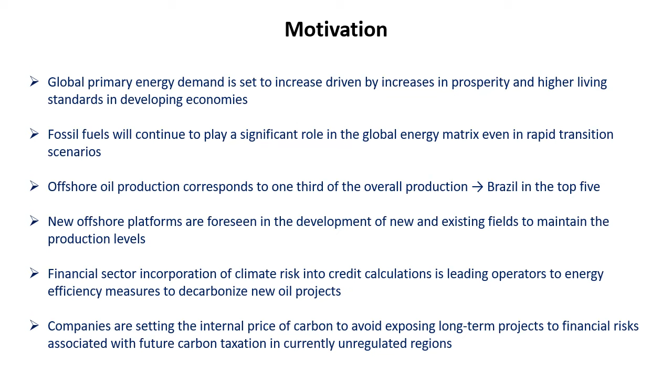The financial sector is incorporating climate risk in credit granting, and this is leading operators to take energy efficiency measures to decarbonize new projects. In addition, operators are introducing the internal carbon price to avoid exposing long-term projects to the risk of future carbon taxation in regions that do not currently have this regulation.

Electricity and hot water generation system of oil and gas production platforms is by far the main source of greenhouse gases in offshore production. The supply of onshore clean energy is not always financially viable due to the cost of long subsea transmission systems. The same is true for wind farms that need to be set in shallow water, sometimes distant from the oil field. The primary processing plants of the platforms are getting bigger and more energy intensive. The allocation of more efficient systems, which is already a challenge, becomes even more challenging in the case of combined cycle, as it occupies 20 to 50% more area when compared to a simple cycle gas turbine.

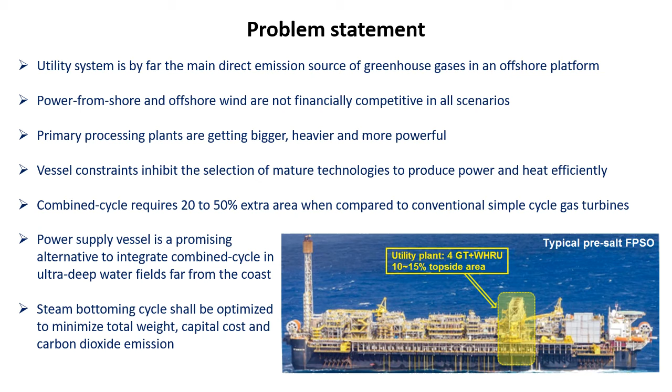Therefore, a power hub becomes competitive in face of industry challenges. Moreover, depending on future carbon taxation, the hub could receive carbon capture schemes, which is not possible in a conventional platform. This work intends to provide designers with a framework to both compare the performance and optimize the design of the steam bottoming cycle to minimize weight, as it reflects directly on vessel cost, as well as the power plant capital cost and carbon dioxide emissions.

In this work, the performance of the utilities plant of a conventional offshore production system containing 4 self-sufficient platforms, that is, platforms capable of producing power and heat internally to supply the vessel demand, is compared with the performance of a production system involving the same 4 platforms, but with power being partially supplied by a central power plant. Fuel gas is supplied to the power hub by the pipeline that exports associated gas to the continent.

It's assumed that the 4 platforms have the same electrical and thermal demand, whose behavior throughout its productive life can be seen in the figure in the lower right corner of the screen. Peak power occurs in year 5 with 81 MW, but the lifespan average power is only 46 MW. Similarly, the maximum thermal demand occurs in year 9 with 46 MW, and the lifespan average heat demand is 22 MW. There is a lag of 1 year before each platform starts operating. The useful life of each platform is 25 years, and the power hub remains active throughout the lifespan of the complete production system.

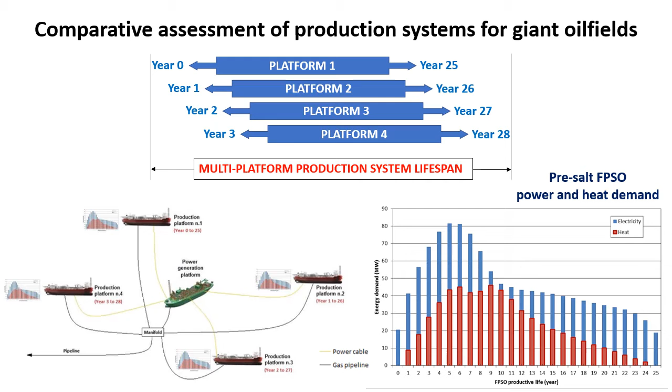In this figure, you can see the control volume of the utilities plant of the offshore production system with the 4 self-sufficient platforms in the production of energy and hot water. This configuration is quite simple. Each platform has 4 Siemens aeroderivative gas turbines model SGT-A35 in 4 at 33% configuration,

which means that the utility system has been dimensioned so that at peak, power can be supplied by 3 gas turbines while the fourth remains in backup to increase operational efficiency in the oil and gas production. Each gas turbine is equipped with its own waste heat recovery unit for the production of hot water at 160 degrees Celsius without burning extra fuel.

The control volume under analysis in this conventional configuration considers the utility plants of the 4 platforms simultaneously. Fuel gas is the associated gas which can be supplied by the platform's primary processing plant or alternatively by the exporting pipeline, for example, in case of gas processing plant shutdown.

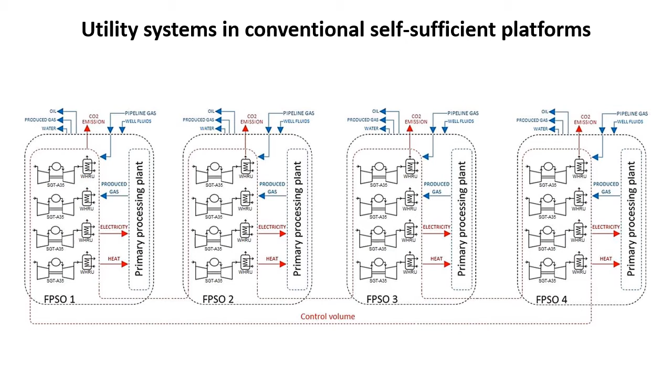On the other hand, the proposed configuration with a power hub adds some complexity to the control volume. Each production platform has only one Siemens SGT-A35 gas turbine with waste heat recovery unit and also 4 hot water boilers with 11.5 MW each, which is capable of supplying the entire vessel's thermal demand even if the gas turbine is out of operation. It's important to note that the hot water boiler has very high energy efficiency throughout the entire operating range, in this case 95%, which is in line with catalog of commercial products.

The power hub has 5 combined cycle power blocks equipped with GE LM6000 PF plus aeroderivative gas turbines with single pressure level steam bottoming cycle, 1 steam cycle per gas turbine. The power blocks are arranged in 5 x 25% configuration, which means that at any power there will be at least one power block in backup to increase the power hub availability.

The control volume under analysis of the proposed configuration considers the utility plants of the power hub and also 4 platforms simultaneously. Fuel gas of the production platforms is supplied as in the conventional case, and the power hub receives fuel gas from the exporting pipeline.

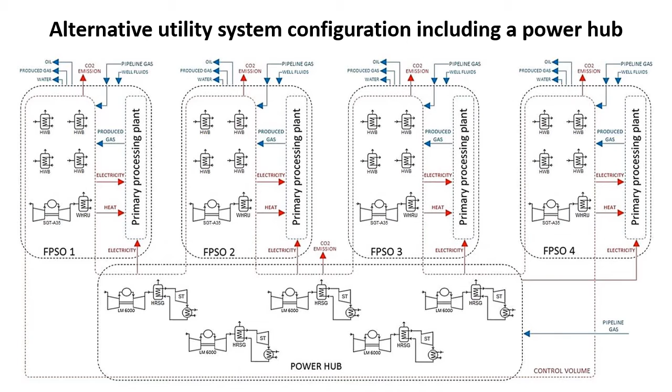Unlike simple cycle gas turbines, the steam bottoming cycles have some design variables that need to be correctly selected by the designer according to the characteristics of the topping cycle and objectives pursued by the power plant. There are 3 objective functions that need to be considered in order to maximize the technical and financial performance of combined cycles for offshore application. The power plant occupied area is important to minimize the size and thus the capital cost of the hull.

The capital cost of the power plant itself is also essential to increase the financial attractiveness of the power hub, and last but not least, the net emission of carbon dioxide per unit of electricity delivered, even more important in scenarios with carbon taxation. The selected design variables and constraints of this work are the steam pressure and temperature in the inlet flange of the steam turbine package.

Design simulations were performed by using GT Pro software in the Thermoflow package. As the software does not have an internal optimization tool, but it does communicate with Excel, a Visual Basic script has been developed to bridge GT Pro and MATLAB for the optimization. An NSGA-II algorithm has been used to optimize the 3 objectives.

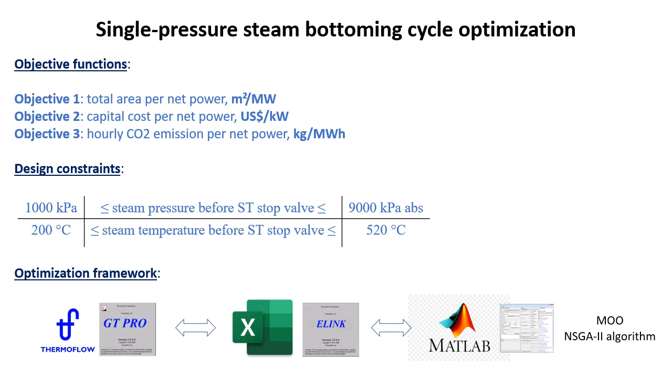The criterion for choosing the Pareto solution that best meets the objectives of the combined cycle considers the normalization of the obtained results. The next step is to calculate the distance of each normalized Pareto solution to 0. The solution with the shortest distance was chosen for the design of the steam bottoming cycle. The table shown in this screen also provides the Pareto solutions that minimize or maximize the objectives.

Despite the variation of the normalized data, it can be seen that the amplitude variation of objective 1 in square meter per megawatt, objective 2 in US dollar per kilowatt, and objective 3 in kilogram of CO2 per megawatt hour are all relatively small.

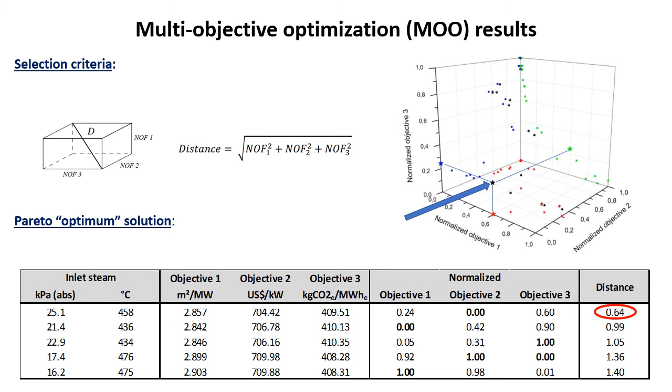Once the design parameters are chosen, the next step is to simulate the results of the combined cycle power block in the GT Master software in order to obtain its off-design performance. The simple cycle gas turbine is also simulated in GT Pro and GT Master. In this case, the waste heat recovery unit has been designed according to the data of a real pre-salt project.

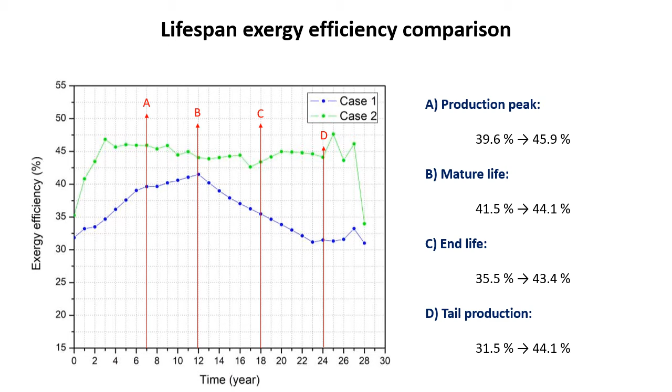The operating range of gas turbines in simple cycle and combined cycle has been limited to between 25 and 92% of the rated power to improve the operating stability of the utility system. Analyzing the operational points of the gas turbines of the conventional and proposed configurations in different oil field moments is important to understand the lifespan exergy efficiency.

In the mature life, when the exergy efficiency gap reduced to the minimum, the combined cycle gas turbines of the power hub were operating far outside the design point. In addition, at the end life and tail production, the gas turbines of the conventional utility system sometimes operate as low as 50% nominal, which explains in great part the very low exergy efficiency of these oil field stages. Moreover, the gas turbines in the production platform of the proposed configuration are partially out and the hot water boilers assume the thermal demand.

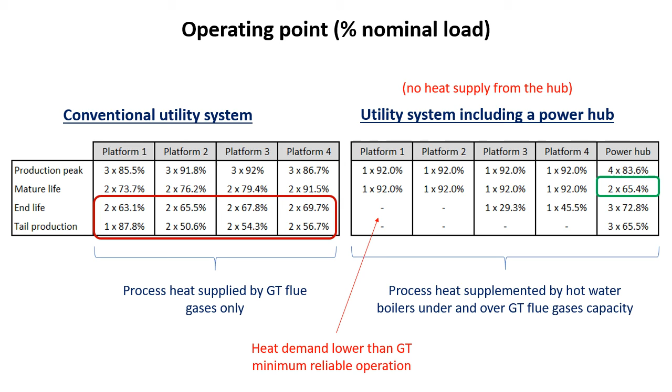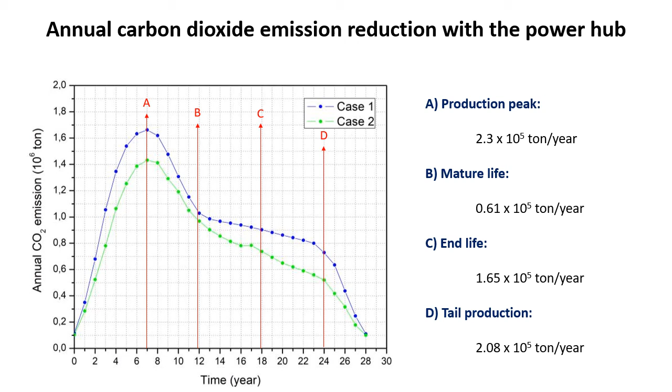The proposed configuration with the power hub reduced the carbon dioxide emission in all phases of the field's productive life. In absolute terms, the greatest reduction was observed at the production peak. This stage is characterized by high electrical and thermal demand. In the mature life of the oil field, the emissions avoided were lower, which can be justified by the exergy efficiency gain of the conventional configuration. At the end life and tail production stages, emission reduction of the power hub configuration increased again, reaching values close to those observed at the production peak, although with much lower oil and gas production.

Here we can see energy and carbon intensities of hydrocarbon production. These indicators reveal a concerning scenario since the environmental impact of conventional self-sufficient platforms deteriorates over time. Mature life basically doubles the kilowatt-hour of power and kilogram of carbon dioxide emitted to exploit 1 barrel of oil equivalent. In addition, in the stage so-called end life, the energy demanded and carbon dioxide emitted to produce 1 barrel of oil equivalent can be 9 times higher than that observed at the production peak.

Similarly, during the tail production stage, the energy and carbon intensities can be 19 times higher, which in practice means that the productive life of the oil field can be ended earlier in a scenario with carbon taxation. The performance of the configuration with Power Hub represents an attractive solution to reduce significantly both energy and carbon intensities, up to 28% at tail production, being a viable solution to reduce the environmental impact of the offshore oil and gas exploitation.

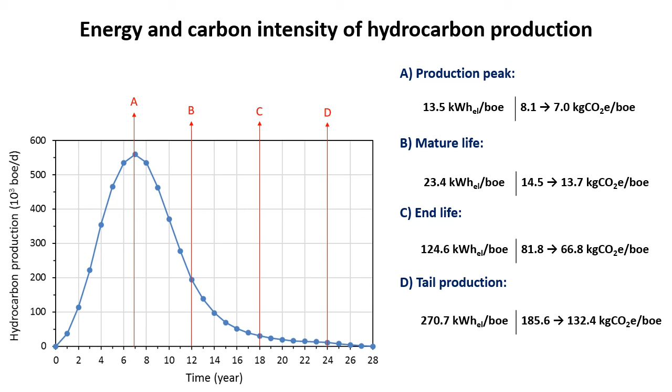Oil companies normally prefer mature technologies in offshore production development projects due to the huge amount of capital and operating risks involved. Deep water and ultra-deep water oil fields with multiple platforms may benefit from combined cycle power hubs. Performance indicators show the great advantage of the Power Hub compared to the conventional platform designs.

Multi-objective optimization approach adds flexibility to the designer to select the most appropriate set of variables in order to obtain the optimum Pareto-front solution. The benefits of the Power Hub should be investigated in more detail to replace the conventional utility system, especially at the second half of the field lifespan. Utility system off-design performance and production platform loads indirectly related with the hydrocarbon production, for example, living quarters, ballast, etc., penalize both energy and carbon intensities.